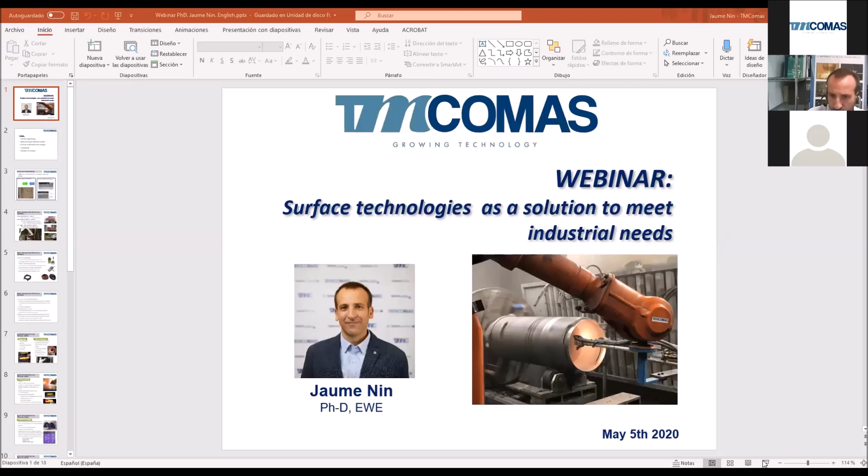Let me check if I'm able to. Okay, here it goes. Okay, so if everything is okay, you will be seeing right now the first slide in this presentation.

The title is Surface Technologies as a Solution to Meet Industrial Needs. Okay, this first webinar is, I would not say basic, but introductory to surface engineering technologies. There are plenty of them. I don't want to explain all of them to you. I just wanted to highlight some of them, pointing out the technology that we have here in house.

And well, it's a basic talk, so don't get disappointed if this webinar is not meeting your demands. We can perform some more technical, complex ones. So, okay, here it goes. First, we will be introducing what is surface engineering. It's quite a brief explanation. Then the best technology selection criteria that I am using day by day. After that, surface modification technologies, conclusions, and questions and answers.

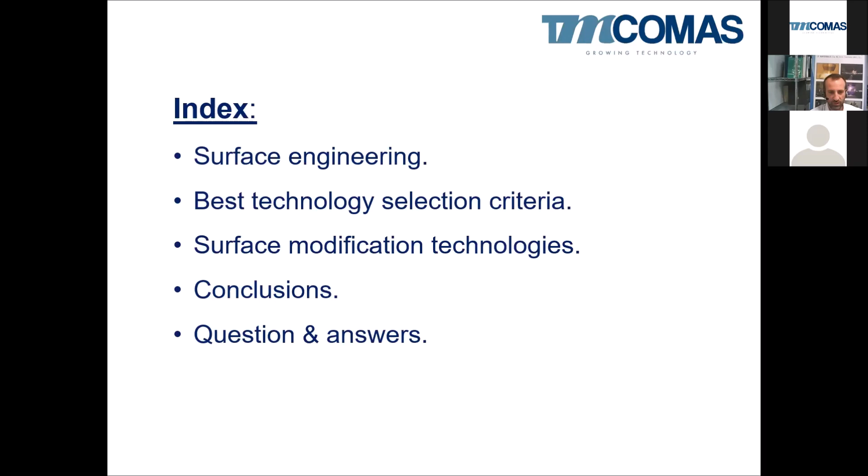So surface engineering is quite an ample definition, but I like to use these words to explain it: all the techniques that are helping us to modify the surface of a material. For what purpose? To enhance the properties, to increase the hardness, to increase the corrosion resistance, whatever. But it has a clear objective, to modify the surface.

So there are two big ways to do that, more or less. One is to do it by modification of the material structure. All of you know that once you modify the structure of a material, you will modify the properties of that material. By changing the structure, you can change some properties. The key point is to know which structure you have to change, or to what extent, to increase one property or another.

And this example is a clear example of a diffusion surface treatment. Here in the left side of the picture, you can see that area, that white coating, white layer, is a diffuse layer, and then here is the base material, the substrate material, which has not been affected by this surface modification. So in this picture of a nitriding process, this is 20 microns, so about 20 microns of the surface has been modified. After that, the substrate is more or less non-affected, non-modified.

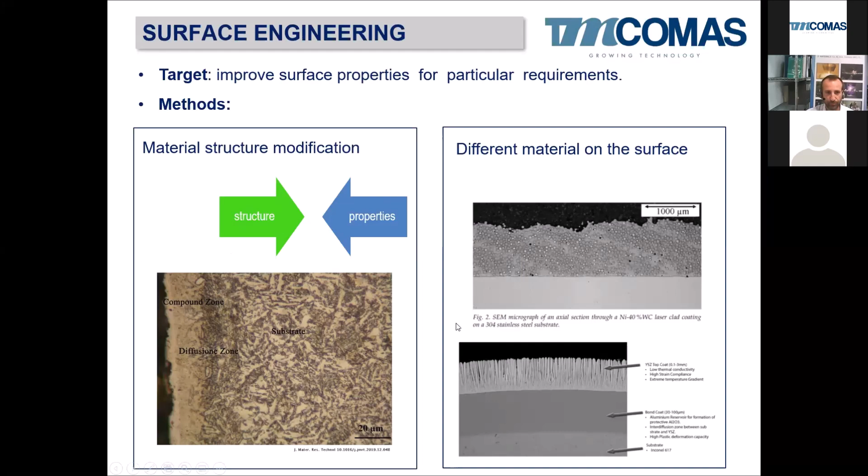Okay, so during my daily work, a big part of this work is to help customers with problems. So, for example, in this case, I'm going to talk about the best technology criteria. So the first one is the location. Okay. So this part that we have to repair, can it be moved? Can it be removed from the workshop, from the place where it is? Then we have to decide if that repair has to be done in the workshop or on site, whether we can move this part to our workshop, or we have to work on site.

It's clear in this, for example, here we have a very big turbine, and someone is performing a heat treatment on site, clearly with all these thermal blankets to control the temperature and the heat treatment on this area. On the other hand, for example, with this big ingot, we have enough space in an oven, or the part is not finished, or the part can be moved to that big oven to make the heat treatment. Sorry. So the dimensions are quite important as criteria.

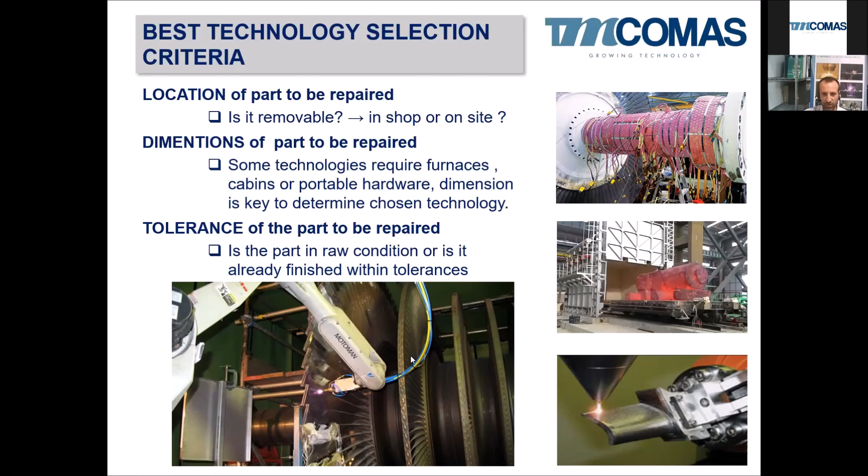Another criterion, not less important, is the user specification. Sometimes our customers are always worried about the hardness because they have a wear problem, so they are very concerned about the hardness. It has to be very hard. Okay, the hardness can be quantified. It's very popular. Everyone knows more or less what hardness is, but it can be complex because there are a lot of conversions, a lot of different readings: Vickers, Brinell, Rockwell C, Rockwell B. So we all have to speak the same language.

Sometimes it's difficult to explain to a customer who wants a coating or a layer that is more than 65 Rockwell C. And then we say okay, I will apply a coating that is 1,000 Vickers. Okay, but 1,000 Vickers, how many Rockwells is it? Okay, it is not comparable.

Maybe 70, but it's not comparable at all. So sometimes it's difficult or it's tricky to understand what the customer wants. Also about the thickness. Thickness is quantifiable, so you can measure the thickness by different techniques, by ultrasound, by eddy currents, by a simple caliper. So you can measure the thickness of your surface modification.

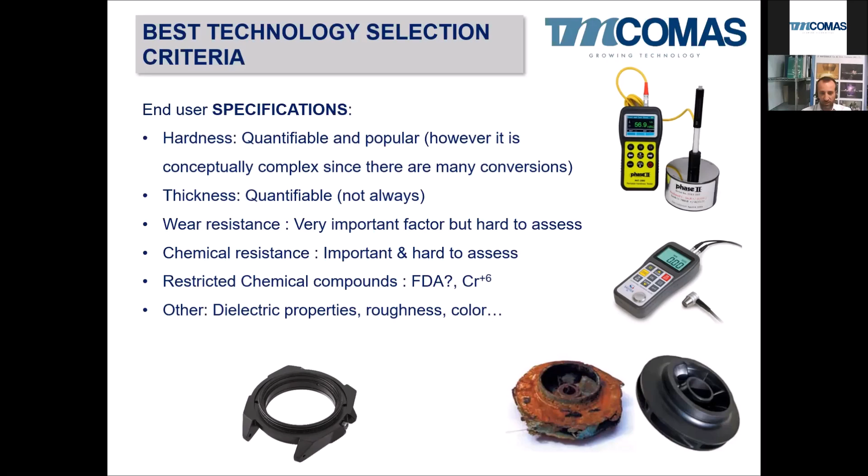Other different specifications that the customers may ask are, for example, roughness, color, the dielectric properties in case of aluminum oxide thermal spray coatings, and so on. Also, there are other criteria not less important. For example, the urgency or the criticality of the part.

Some customers, as I said, may need some reliable, proven and approved processes, certified according to norms and regulations such as aeronautical, API, or Lloyd's in case of shipyards. In these cases, there are not a lot of choices. There are not a lot of surface technologies that can be applied, but only the ones that are allowed for these standards and regulations.

Is the process qualifiable? It's a question that a lot of customers are asking us when we are talking about laser cladding, because as a welding technology, they are used to having standard and qualified welding processes like electrode or MIG or submerged arc welding. So yes, it's a question that everyone is asking for very critical applications, and the answer can be sometimes no. It's not a qualifiable process like a welding. It's a painting, an electroless nickel, or whatever. Or sometimes it can be yes. It's a laser cladding, so we can qualify it perfectly as another welding procedure.

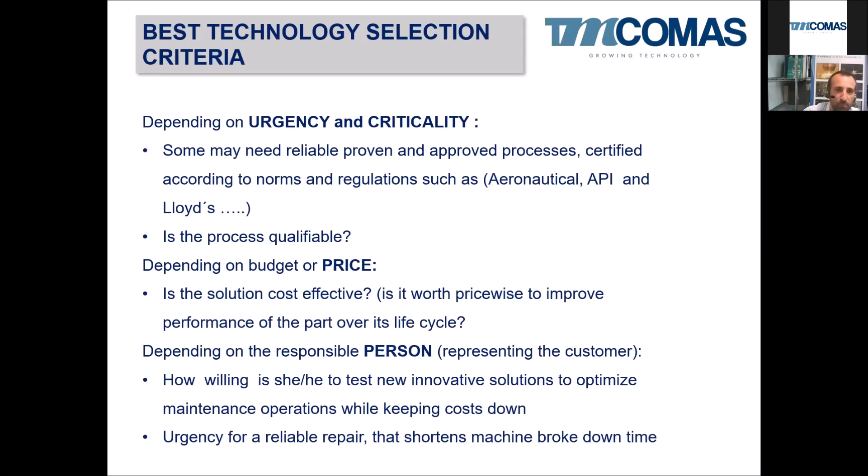Well, once I have explained to you more or less which criteria we are taking into account to try to address a particular case, I would like to explain maybe 8 or 10 surface modification technologies. I have distributed them into groups. Some of them affect the bulk of the material: conventional heat treatment, cryogenic heat treatment to increase maybe 1 or 2 Rockwell C in some knives for high-speed steel, for example.

Cold forming, hot forming. As you can see here, we are forging a piece, we are forging a blade, a compressor shaft, for example, or whatever. So to increase the toughness, to increase the impact values of this material by affecting all the bulk of the material. While in the other group, we have the technologies that affect the surface.

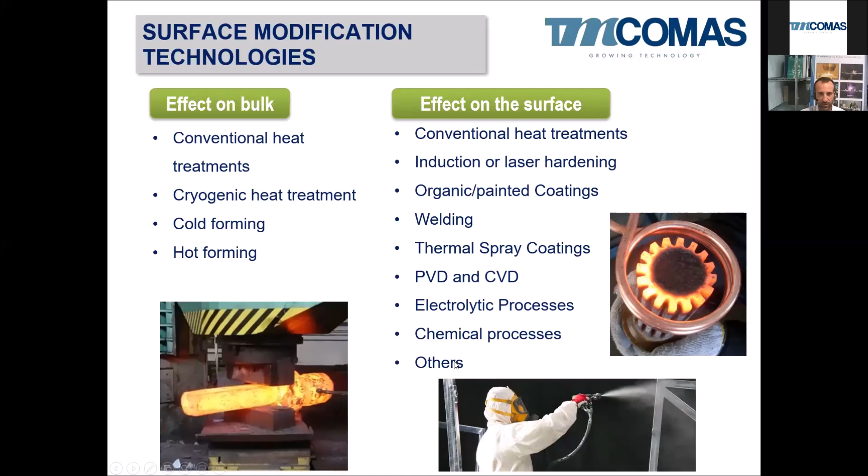It will be conventional heat treatment like nitriding or case hardening, induction or laser hardening, organic or paints, coatings, weldings, thermal spray coatings, PVD and CVD, electrolytic processes, platings, chemical processes like electroless nickel, for example, and others. So let's have a look at them more or less.

Okay, the first one is quenching and tempering. All of you know what quenching and tempering heat treatment is. It's a very old treatment. It's quite low cost. It's suitable for large scale production. As you can see here, we have a belt furnace in which 1,000 parts can be heat treated at the same time, for example. Or here we can use one furnace to place a lot of different shapes in the same heat treatment.

So with this quenching and tempering, it can give possible deformations to the materials. Also, there can be some kind of lack of hardening homogeneity depending on the hardenability of the material. Not all materials can be hardened to the core. Some of them have an exact composition to increase the hardenability. It means the depth at which quenching can affect. So this has to be taken into account.

Also, we have to be very cautious because all the properties that we want to modify with quenching and tempering are limited to mechanical ones. So, except some exceptions, we cannot improve clearly, dramatically the corrosion resistance or the wear resistance by these quenching and tempering processes.

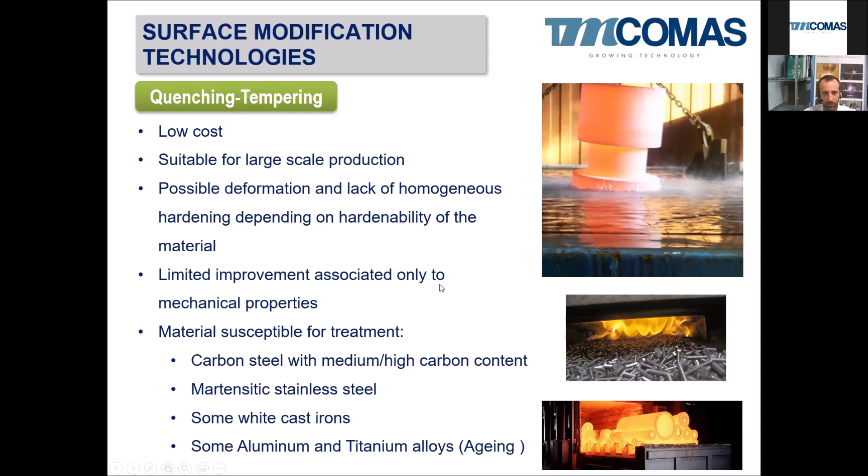Nitriding and case hardening: these surface treatments are also done in furnaces or in ovens like those here. There are different nitriding methods using gas, salt, or ionic, and also carburizing. With case hardening, we have nitrocarburizing and other kinds of case hardening processes. I would say they are quite low cost processes. They are ideal for medium and large production because, depending on the size of the furnace or the oven, a lot of parts can be in it.

There's the possible deformation of the part, since all these processes are done at 500 to 600 degrees. So depending on the size and the dimension of the parts, there can be some deformation. The hardness depends on the base material. Yes, that's true. There are special steels for nitriding. There are special steels for case hardening. So not all the steels will reach 1,000 Vickers, and not all the steels will be suitable for nitriding, for example. So just check with your supplier which steels can be optimal for that.

High hardness and good lubrication properties. Yes, with these surface treatments, the surface is very hard and it has some lubrication properties. So it's very used for gears, for example, keeping the core of the steel in a tough state and just making a hard surface to avoid the wear of the gears.

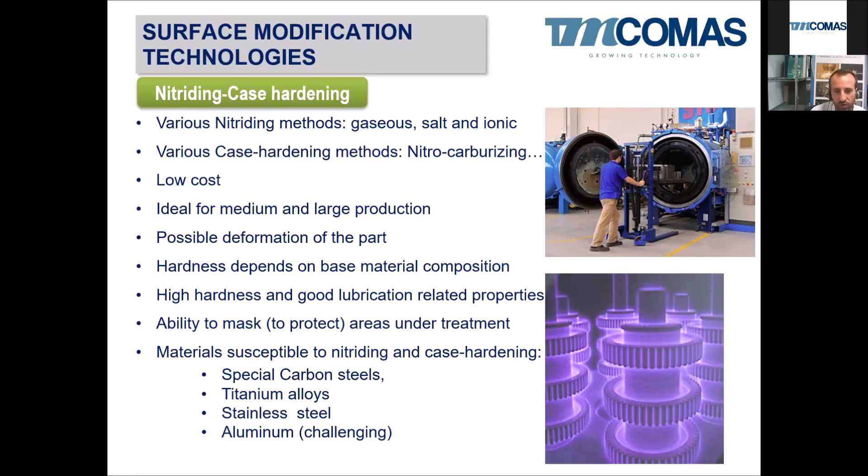Well, the next one is welding. Welding is a very, very known technique. I will talk about cladding. So not joining, not welding two parts together, but welding onto the surface of the part to improve the properties of the part. So it's hard facing when this welding is for wear protection. Cladding is more or less a generic word for this welding of coatings for protection. And overlay is more or less when we apply a welding layer to protect the base material against corrosion. So hard facing for wear, overlay for corrosion, and cladding is a general term.

So these surface modification technologies, electrode, MIG, TIG, submerged arc welding, electron beam welding, are more or less quite cost effective, or not, depending if it's very special. But in general, welding is quite cost effective. It's ideal for low volume production. It's clear that if it's automated, it also can be for large scale production by robotic welding, for example, or heavy duty submerged arc welding.

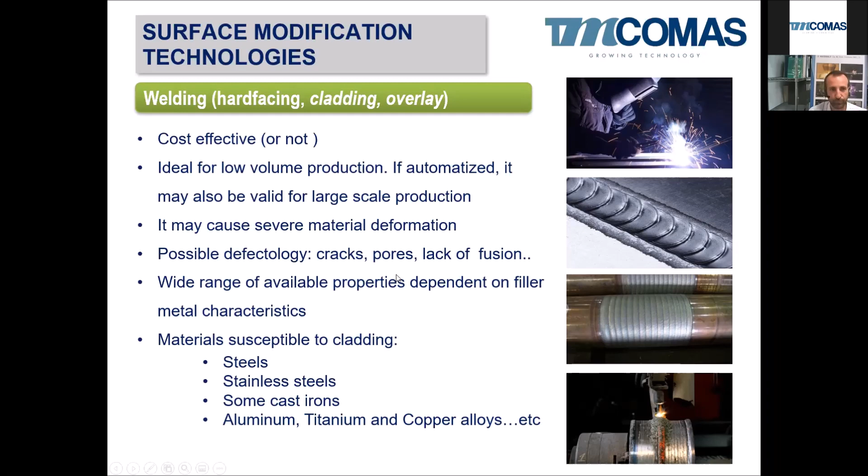Laser cladding. Laser cladding is one technology that we have in-house. We are very known for that in Europe. We were and we are the only company in Spain using laser cladding to repair parts for customers. And we have been very active for 10 years, 12 right now. So we are quite an expert on using that nice technology to repair and to apply interesting coatings onto materials.

So yeah, it's a welding process with minimal heat input. We have a very localized input of heat due to the use of a laser beam that is focused on the top surface of the material to be clad. And due to that incredibly high power density, we can move the heat quite fast. So the welding speed of the cladding is very high, and this is also causing the heat input in the base material to be quite low at the end.

So having in mind that we have a very low heat input, there are a lot of benefits. Virtually no deformation of the base material, and also we can achieve some very nice properties due to the fast cooling of the welding material. The grain is quite fine, so we can achieve maybe 1 or 2 Rockwell C more in comparison with an overlay made by TIG or by submerged arc welding.

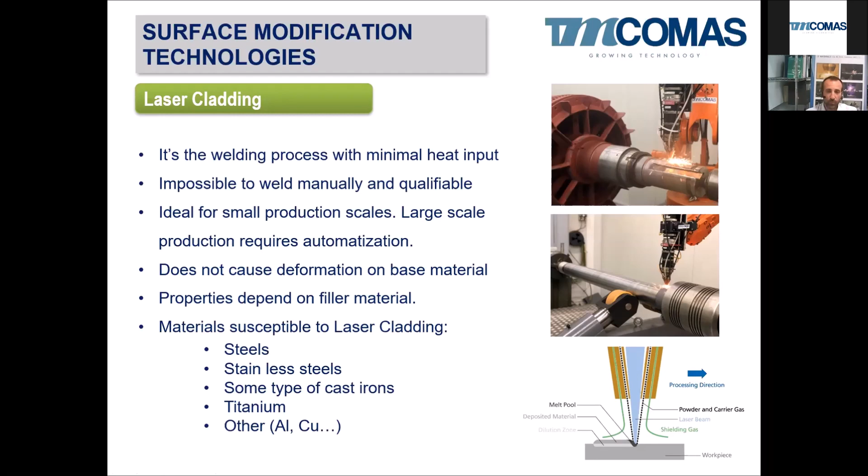So after that nice technology, hard chrome plating. This is a very known technology, a very friend of all of us that are dealing in this industry. It's a slow process. It's a process that, I would say, is going to disappear in not many years, because the baths are very pollutant. The chromium 6 bath, the chromic acid, is very pollutant, and there are a lot of restrictions in Europe to use those baths. So in Europe, at least, this process will disappear soon.

This process is an immersion process. It's a low temperature process. It's electrolytic, so it does not cause deformation. Generally, it's quite homogeneous, although some pores and especially cracks may be present, especially in edges or when we want to achieve a thick coating.

So it can be a solution, the cheap solution, a fast solution for some applications, but it has been improved. It has been overcome by thermal spray coatings, tungsten carbide. It has been overcome by laser cladding of Ultimet, for example, coatings for piston rods in offshore. So it was an ancient technology that has a lot of limitations, but from time to time, some parts still arrive to our workshop with hard chrome plating, and we are replacing them by our coatings or by our other more technologically advanced solutions.

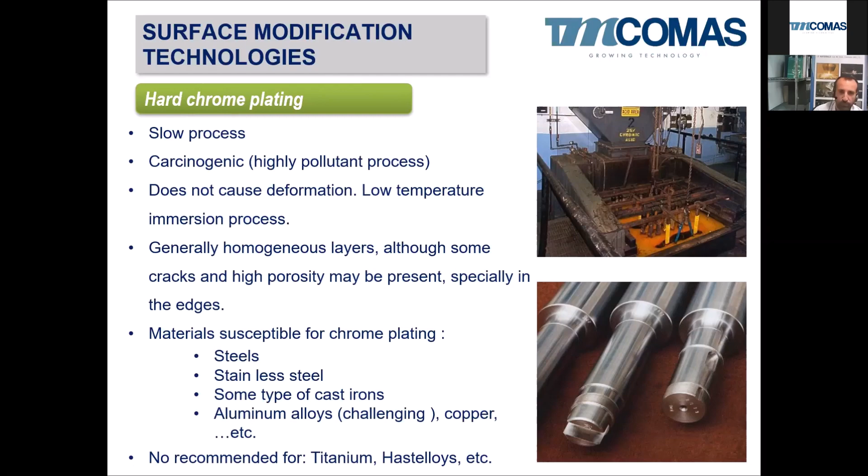Okay. PVD and CVD. PVD stands for physical vapor deposition and CVD for chemical vapor deposition. These two technologies are quite advanced. They take place in a reactor or in a chamber, which is under vacuum. That means that we have to work in batch productions. It's ideal for medium to large scales, since here, as you can see, we can place hundreds of small parts into that reactor, and we can perform that coating to all of them at the same time.

It's a slow process and requires specialized suppliers because it is a vacuum process, so it has to be people that know how to use the vacuum technologies. Possible deformations, because some of these coatings are created between 400 and 900 degrees C, so it has to be in mind that depending on the shape and on the deformability of the parts, there can be some bad experience.

There are also some low temperature coatings available in recent years, especially diamond-like coatings at 180 degrees, 200 degrees, which give you extremely high hardness and extremely resistant coatings, but very thin, 3 to 5 microns. Well, we are using these coatings for all the cutting tools. It's the standard procedure to coat tungsten carbide or high-speed steel cutting tools by PVD coatings.

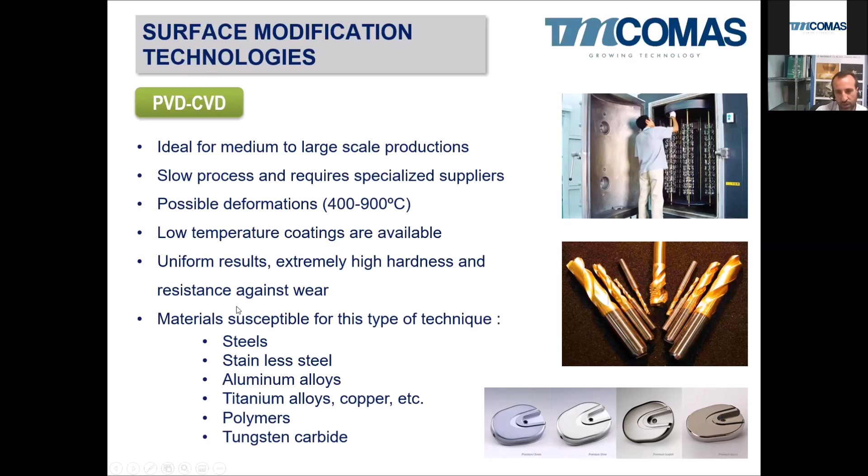Thermal spray coatings. These coatings are also very used in some applications. We have all this technology in-house. For 40 years, we have been the pioneers and the leaders of thermal spray coatings in Spain and in the south of Europe, and we are using it every day in the 3 booths that we have in our workshop. So it requires qualified suppliers as we are, because they are not straightforward technologies. There are a lot of parameters that are affecting a coating, and we have to control all of them at the same time.

At the end, the definition of thermal spray is like painting. It's like painting with a gun, with a stream of semi-molten particles. So you have a gun in which comes some energy, like this flame, or an electric arc, or a plasma arc, to melt the spray material, the filler material that comes in. It can come in the shape of powder or wire. And then there is an atomization and a propulsion of these molten particles to the substrate.

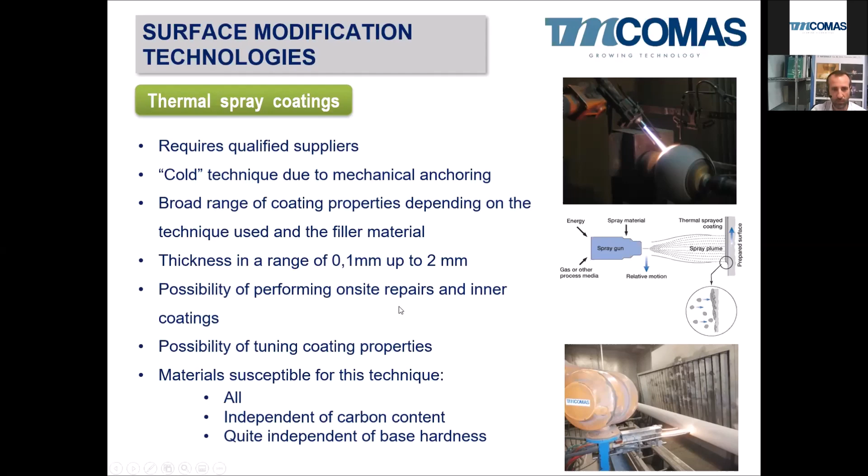And finally, there are a lot of other technologies like electroless nickel, which is widely used today for food applications, nickel PTFE, and still some plating. We apply silver coatings by plating to protect reactor joints from galling once they are installed. With the lid, they press a lot to seal the reactor, and this metallic ring is pressed between two metallic surfaces, and the silver coating inhibits galling between the surfaces.

Cadmium, which is no longer allowed in Europe. Other people ask for zinc coatings, galvanizing. On aluminum and titanium parts, we can do anodizing, an electrolytic process which creates a hard, thin protective coating on the surface of titanium and aluminum.

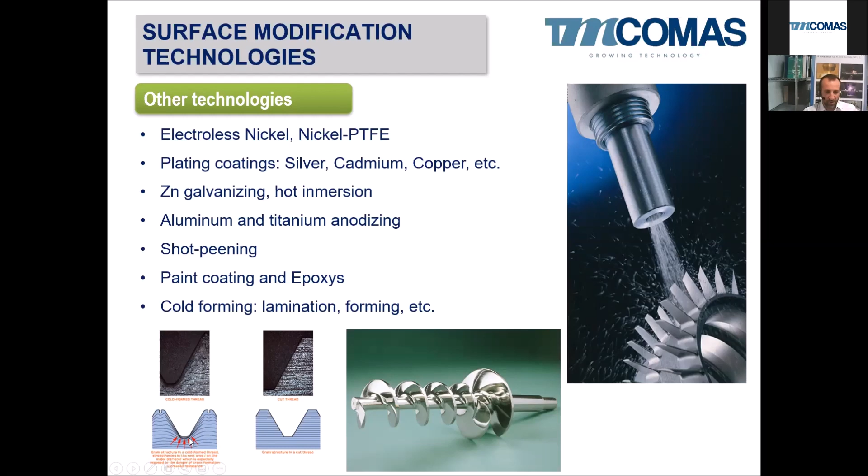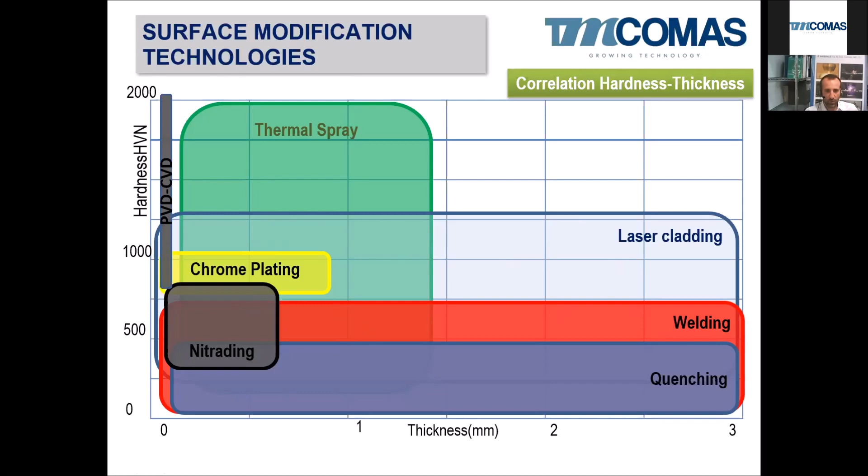So with this nice slide, we are at the end of the presentation. So, conclusions. Some questions. Can you apply a laser cladding coating onto titanium-based material? Yes, I have already said it during my presentation. We are currently applying laser titanium layers onto titanium shafts that have lost some dimension. So we are using a titanium cladding to recover the original dimension.

Another question is, is thermal spray the best? Well, I would not say it's the best. I would say it's one family of technologies to use, one family of technologies to choose. They are complementary with laser, with PVDs, with other techniques. There is no one universal technique. There are a lot of techniques to use, depending on each application, each part, each customer. So I cannot say that thermal spray is the best. It's one of the tools that we have.

So let's continue with the conclusions. There are many technologies that can improve surface characteristics of the parts. Close communication with the end user is fundamental to understand their needs and the expected outcome. Sometimes it's necessary to tell the customer that he might be looking for impossible things, and it's not always nice to tell the customers that.

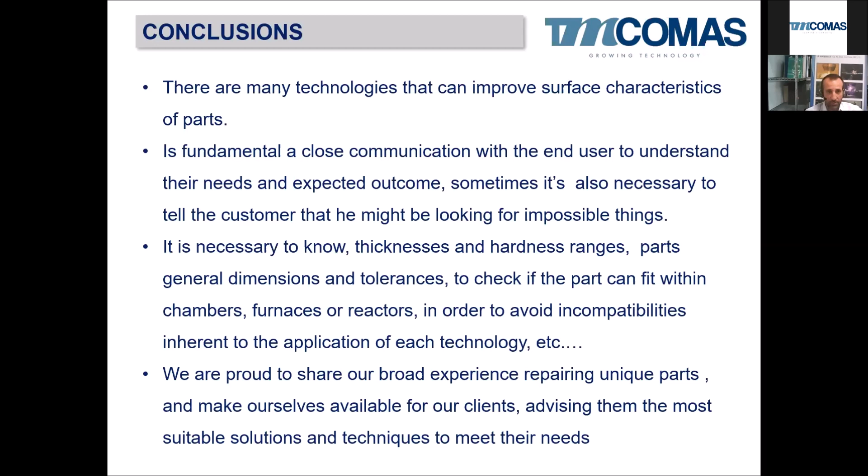So, another question: what about cobalt or nickel-based hard-facing laser clad onto titanium-based material? Is this common? Well, frankly speaking, titanium is hard to clad because laser cladding is a welding technology, it's a fusion technology. Depending on the compounds, on the mixture between cobalt and titanium and nickel titanium, it can be impossible or not. If I had to choose, I would choose nickel, because nickel titanium is a material, so maybe the compatibility of nickel and titanium is higher than cobalt and titanium. I would say no, it's not common.

I know that for titanium shafts, there are people using thermal spray coatings to repair or to increase the wear properties of titanium-based spare parts, especially in aeronautics. But by laser cladding, we haven't tried. We have tried titanium over titanium, but not nickel or cobalt.